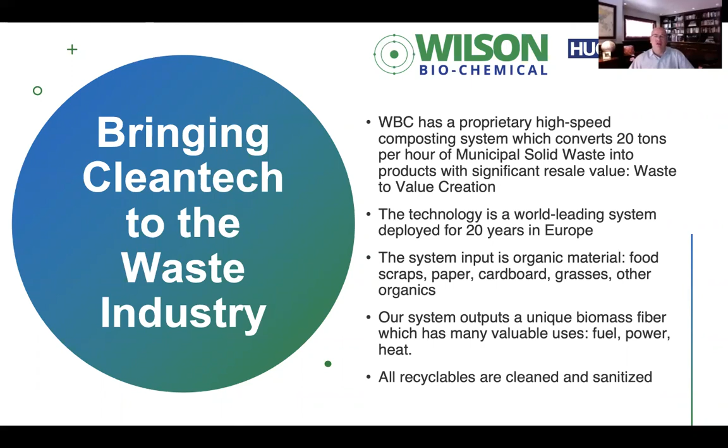Our system is a high-speed composting system which uses steam and pressure, important to point out we do not burn or melt anything, to transform 20 tons of organic waste per hour into a biofuel which we sell. And the recyclables are cleaned, sanitized, and also sold for profit. The waste we compost consists of all organics in the various waste streams: food scraps, paper, cardboard, grasses, and other organic agricultural byproducts.

The most available and lucrative waste stream we process is municipal solid waste, which is household garbage. 20 tons per hour of municipal solid waste is loaded into the Wilson steam autoclaves: 60 feet long, 10 feet high, carbon steel vessels, which are closed after filled, pressurized to 70 psi, injected with steam, and rotated at 3 to 5 RPMs, like a giant washing machine.

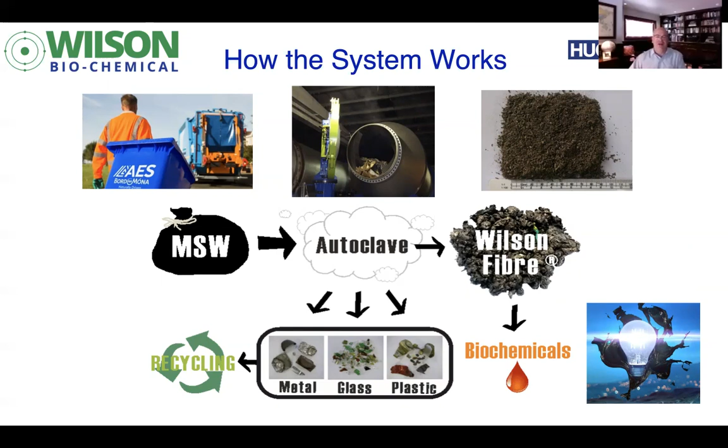After an hour, the composted material is removed and sorted to send the non-organic material, which is the glass, the plastic, and the metals, to recyclers, and we are left with the biogenic sanitized Wilson fiber, which is then dried for further downstream uses as a solid and a liquid biofuel. But I always feel it is much more entertaining to show you a short video, which will give you a nice overview of the process in 90 seconds.

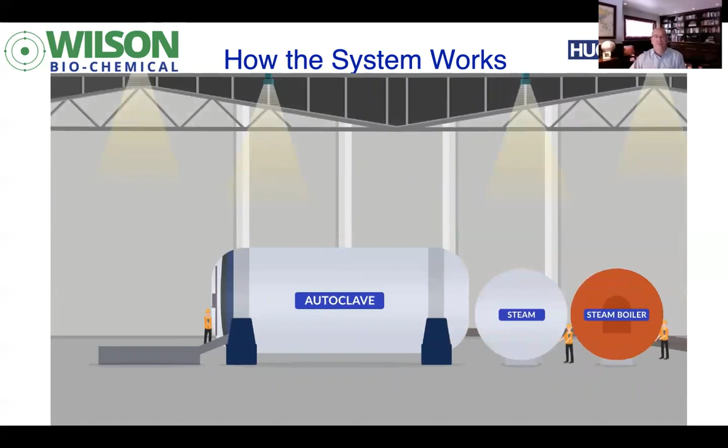Disposing of garbage is complicated, time-consuming, and requires multiple stops. The distance from a transfer station to landfill is often long, and many landfills are filling up fast. And when the garbage gets to the landfill, the work is complex and costly. With a high financial burden and increasingly limited capacity, waste professionals need to secure their business for the long term. Hughes Energy has the solution. Hughes Energy installs a hyper-speed composting system which will transform 20 tons of garbage per hour into a saleable fiber, a renewable source of energy.

The proprietary system uses steam technology to compost in 1 hour all the food, paper, and cardboard into a fiber, which is then sold for profit. Even the recyclables are fully sanitized and ready for sale. With Hughes technology, waste professionals turn a cost into profits. And by diverting all organic waste from landfill, they increase the amount of waste they can accept. Fully modular, scalable, profitable. Hughes Energy helps waste professionals turn costs to profit.

As you can see, the technology and the process is super simple. Every element of the system, steam boilers, pipes, the autoclaves, and conveyors have all been commercially deployed for over 150 years. A few things that are very important. First, our system operates at low temperature, 160 degrees C, so none of our material is melted or burned. Second, the Wilson fiber is not a refuse-derived fuel, which often includes shredded plastics.

In fact, the fiber we produce has a legal standing in Europe and the UK called end of waste, which as a matter of law means it was never waste in the first place. Third, our waste to fiber plants have very few emissions to water, land, or air because we're composting the waste using recycled steam. In fact, the only emissions from our plants are that which comes from a natural gas boiler, which we use to raise steam.

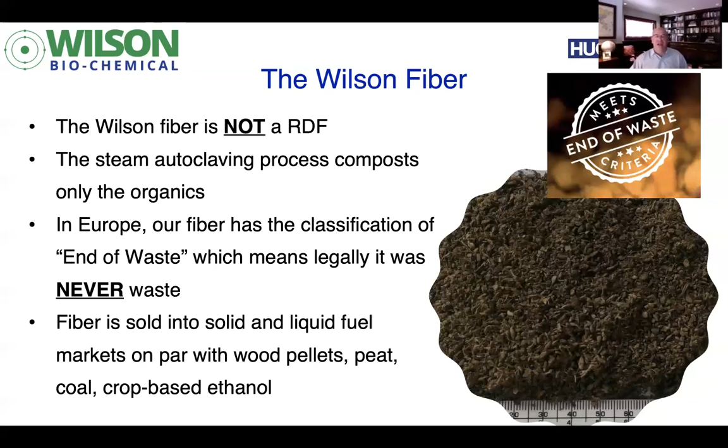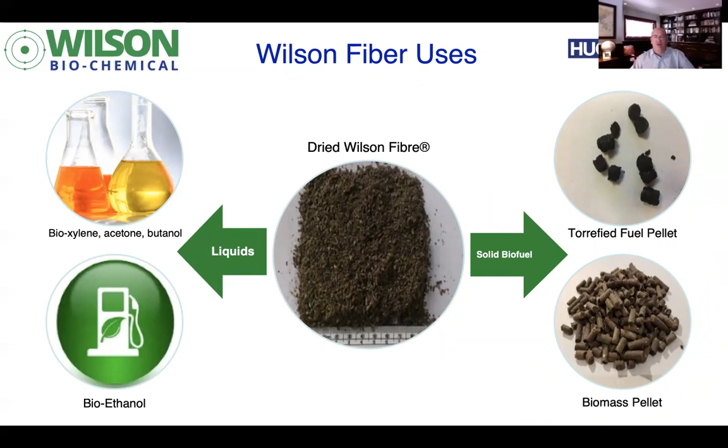Our product, the Wilson fiber, is sold into the solid and liquid fuel markets on par with wood pellets, peat, coal, and crop-based ethanol. As I'll discuss now, there are two main avenues to market for the Wilson fiber we produce. There's a solid biofuel route and a liquid biofuel route.

The solid fuel products, which are made from our fiber, are direct comparators to white and black wood pellets. Our Wilson pellet, which is akin to a white wood pellet, is about 6,900 to 7,200 BTUs per pound at about a 12% moisture level. Our torrefied Wilson pellet, which is akin to a black wood pellet, for which we have a patent pending, is 8,500 to 9,000 BTUs per pound at about a 3% moisture level. The pellets themselves can be made in any shape and size required by the customer.

Our recommendation is that the Wilson solid fuels be used in a blended manner with traditional wood pellets for industrial scale biomass power applications. Each of our plants only produces 70,000 tons of Wilson pellets per year, which is much less than industrial power generators need. Wilson pellets should be blended with traditional wood pellets. As a green, renewable fuel, which is independent of weather, infestation, and sudden raw material price increases, Wilson pellets provide a risk hedge for customers.

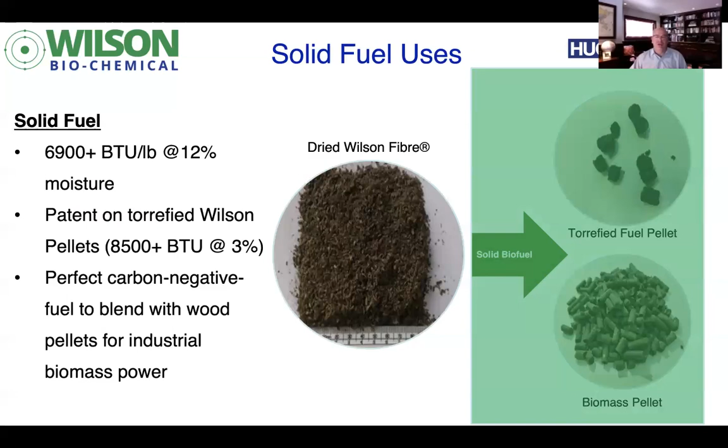When we talk about the liquid fuel route to market, Wilson Biochemical and our partners have proven that we produce consistent, repeatable biochemicals and biofuels on a batch basis. Over the past 5 years, the Wilson team has won several high visibility, very competitive projects from the EU, the UK, and India, from government and private industry for the production of biochemicals from biomass.

Some of our Wilson team's results have been published in European technical and scientific journals as breakthroughs in turning organic municipal solid waste to biochemicals. We've achieved the pre-production technology readiness level, which is known as TRL6, for biobutanol and bioethanol production. We are in advanced negotiations with a major European chemical company to build an integrated plant at industrial scale.

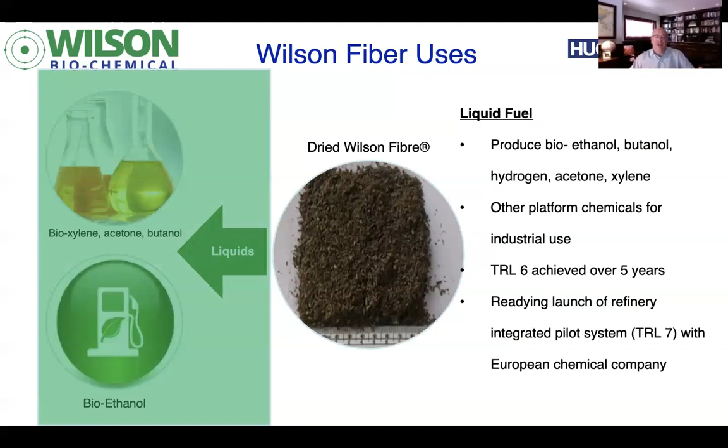Of course, all this sounds wonderful. It is wonderful, but let us take a look at why this is important. Climate change is obviously an enormous problem, full stop. Everyone knows that. While CO2 emissions garner the majority of the attention around greenhouse gas emissions, methane, which is 20 times worse as a greenhouse gas than CO2, has become a major source of concern, even among the general public, as well as scientists and policymakers.

16% of global methane comes from rotting organics in landfills. We eliminate this source of new methane because we extract the organic material from the waste stream. When we add the use of our fiber in a biofuel application, we are also addressing the largest emitter of methane in the world, the production and use of fossil fuels.

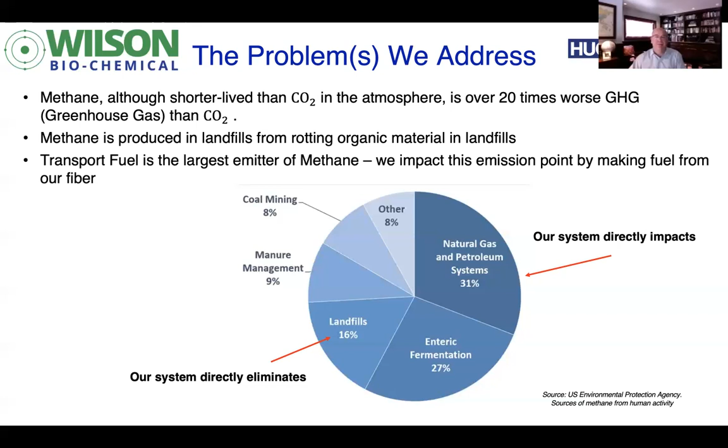The UN Intergovernmental Panel on Climate Change, or IPCC, is tracking against the global target set at the Paris Climate Accords, which aim to keep global temperature rise to 1.5 degrees Celsius. The IPCC has stated that in order to hit this target, a deep reduction in methane is critical. Current policies today in force are projected to cause, in fact, a 3 degrees Celsius global temperature increase, double the Paris target. This is in large part due to the inability of the world to produce biofuel for transport at a sustainable rate and cost.

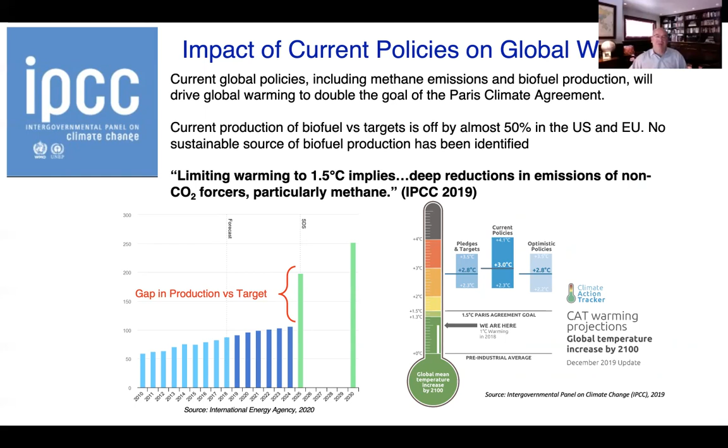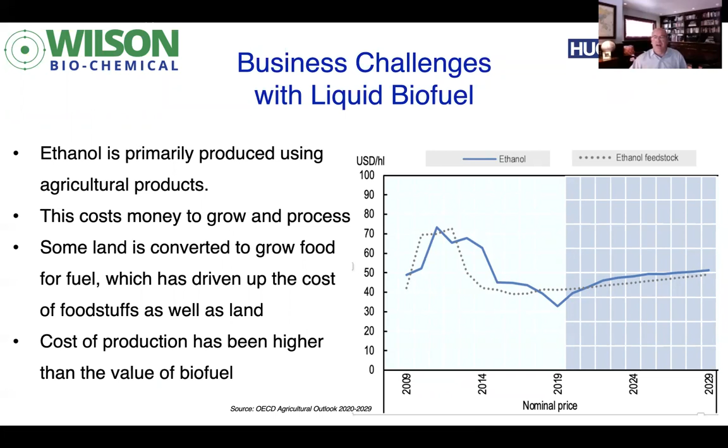There are many reasons for this gap in the production of biofuel, but as with most changes, the reasons are primarily driven by economics. Food-based crops, usually corn in the United States, are the feedstock for most bioethanol production. And like wood for wood pellets, the cost of these food feedstocks are meaningful, especially when trying to break in against the fossil fuel industry, which has enormous economies of scale. Even with subsidies, it is very hard to make money by creating biofuel, as this graph indicates, and that projection is expected to go on to 2029.

Unsurprisingly, the result is that the world is not producing enough biofuel to meet the targets we ourselves have established. As this graph shows from the International Energy Agency, the gap between what is needed and what is being produced is in fact becoming wider.

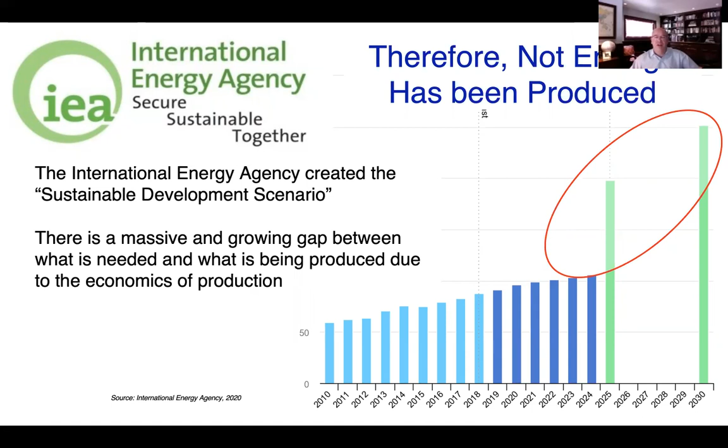The good news is the Wilson Biochemical team has a solution to produce biofuels and make money. Operators of our technology have a very favorable and enviable business model. There are not many industries where a factory is paid to take its raw material and is paid for the product which is manufactured. I think that's a very important element to what we do. We're paid for the incoming raw material and we're paid for the product manufactured. And that's true for the solid biofuels as well as the liquid biofuels.

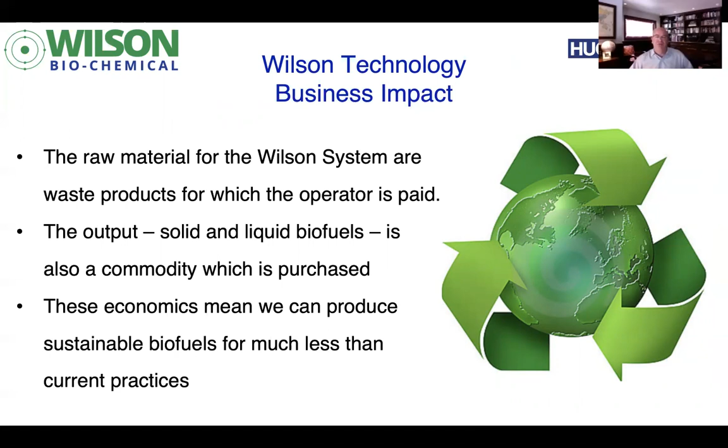As it relates to biofuels, these economic drivers mean that we can produce biofuels at a cost which allows companies to make good money. There is a significant reduction in the production cost of biochemicals using Wilson fiber as a feedstock.

How does the Wilson Biochemical team do it? Much like our hyperspeed composting system, which turns organic waste into fiber, the technologies and processes we use for biofuel and biochemical creation are proven and repeatable. We use a modified hydrolysis, distillation, and fermentation process to convert our fiber into biochemicals. These are the same exact processes which create beer and whiskey. So I think we can agree they're quite proven.

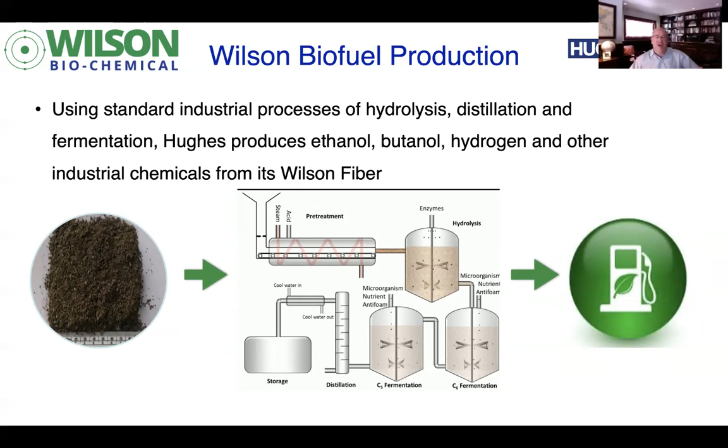A key technical point is that the steam autoclave process in the front end breaks much of the lignocellulose bonds in the organic material, making hydrolysis less caustic and cheaper. This has historically been a major problem in converting many organic materials into biofuels or biochemicals.

Today, Hughes and Wilson Biochemical are working in partnership with a major European chemical company on a proprietary process to optimize the production of sugars and chemicals in the most cost-effective and repeatable way. These sugars are then converted into biochemicals or biofuel in a proven and very straightforward way. The results over the past 6 years have demonstrated a significant reduction in cost to produce biofuels from Wilson fiber versus traditional agriculture-based methods. Watch this space over the next 6 months for some major announcements.

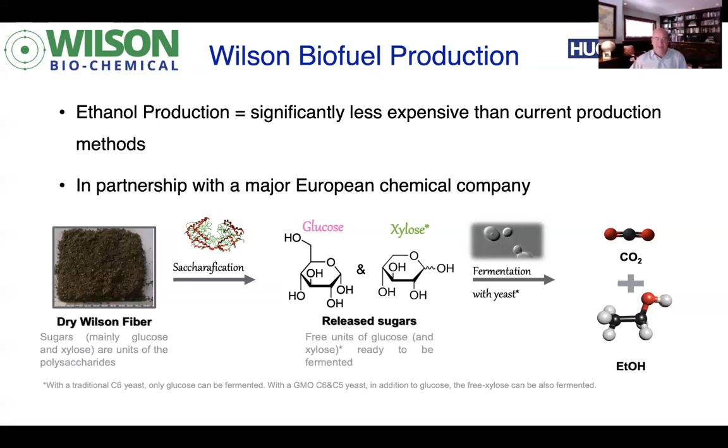You will not be surprised, given everything I've told you today, that each Wilson plant offsets 200,000 tons of carbon dioxide equivalent per year. This is the same amount as 15,000 Americans produce every year. In the US alone, the Wilson technology has the potential to offset over 15 million Americans' CO2 footprint per year. Globally, the opportunity for CO2 offset reaches a higher order of magnitude.

For the near future, using the Wilson technology as a means of producing biofuel from organic waste streams is a very practical, proven solution for the problems of waste management today. We can produce significant volumes of biofuel, which makes money without any subsidization. Each plant will produce approximately 3.4 million gallons of bioethanol every year. This is an important step in the creation of a more circular and sustainable energy economy.